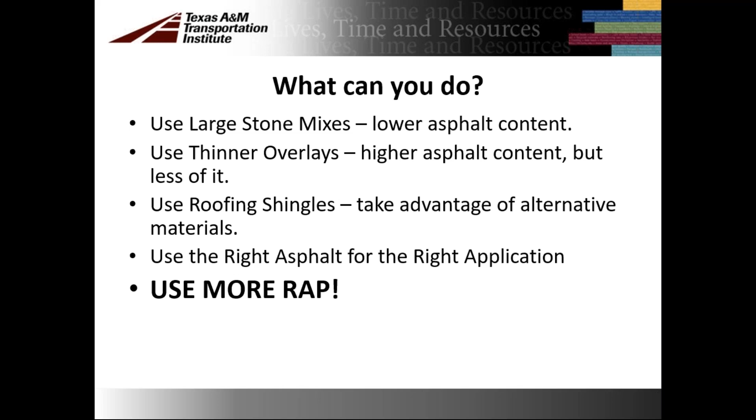So what's the difference? Well, you might have had a bad experience or no experience. Under bad experience, the variability due to poor materials management, you might have RAP coming from a parking lot, or RAP coming from a roadway. And if we mingle those together, the two properties can kind of drive us crazy when we're doing a mix design. So we may want to build different piles with those and deem one for a particular project to help us with that variability issue.

The issue with fines, now we really like the fines in there because I think it builds a paste type that really helps us glue that material together, if you will, if I can use those words. And non fractionation of the RAP, if we don't do that, we could have some bad experience.

I know when I started 35 plus years ago, we just put the RAP over the scalping screen. It flowed into the drum and we mixed it. And sometimes it would drive me crazy doing a gradation. I'm sure a lot of y'all have experienced this.

But now with the fractionation, we can build these different piles of different sizes and add that in percentages and kind of get the outcome exactly what we want when we do a gradation. So the fractionation has really helped.

Under no experience, you don't know how to design a mix with RAP. You don't know how to handle the asphalt content because RAP, recycled asphalt pavement, has asphalt liquid around those aggregates that has been in the ground for a while. And it will flux off as it's heated, and it could increase that content and not be exactly what we wanted.

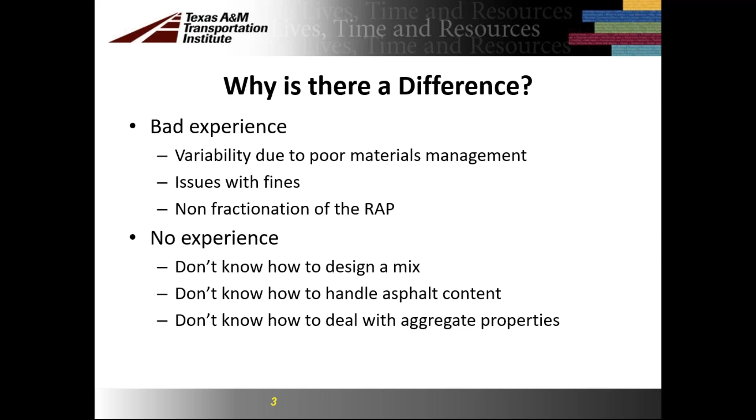I like this part, how to become a rapper. Well, view RAP as a valuable resource. A lot of times it's just the cost of getting it milled off the road and the haul back to the plant, and maybe if you fractionize it, do some fractionation. There's a minimal cost in doing that.

You want to try to minimize the handling of this as much as you can, but with the coating of asphalt, it's not going to degrade the aggregate any. So we can move it around just to save us money, try to minimize that handling.

Treat RAP as you would other ingredients. It is an aggregate, it's a coated aggregate. And we really like that because it adds to the strength of our asphalt pavement.

Offer yourself maximum flexibility in using RAP. Learn what's in RAP, again, the stockpiling. If you've got a parking lot off of a retail shopping center added to a high quality aggregate and high quality binder mixed together, it could drive you a little crazy when you're testing it, trying to get that acceptable range that you'd like to have.

Monitor the process and materials continuously, keep it consistent. So we can do this, we can deem piles for different jobs if we've got the room for it. And it does really help.

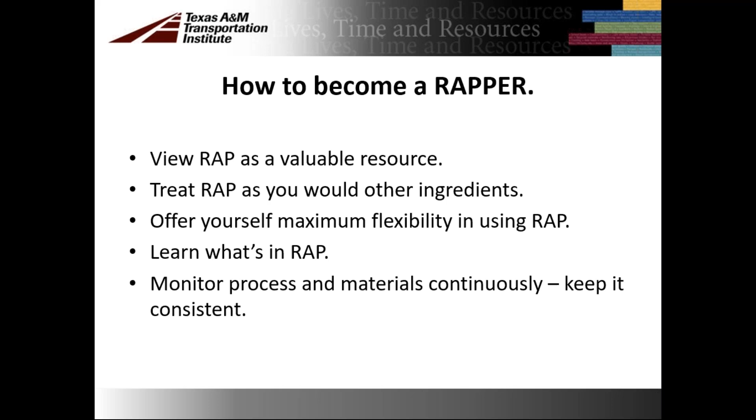I really like RAP. You can see this materials evaluation flow chart. Again, we'll start out with maybe some virgin aggregate, we're going to do aggregate testing. Then if you come down to the RAP, we're going to try to do a binder extraction recovery to see how much liquid there is in that recycled asphalt pavement. We might do some aggregate testing and binder testing.

We might have virgin asphalt there at the bottom, and then we're going to do some binder testing also on that to see our properties. And then as we go across, we're going to combine that gradation and properties and see what we got. Then we're going to combine it with the liquid. Then we're going to choose the highest percentage of RAP for the aggregate and the binder criteria that we have. And then we're going to perform a mix design. So you can see kind of how this flows along.

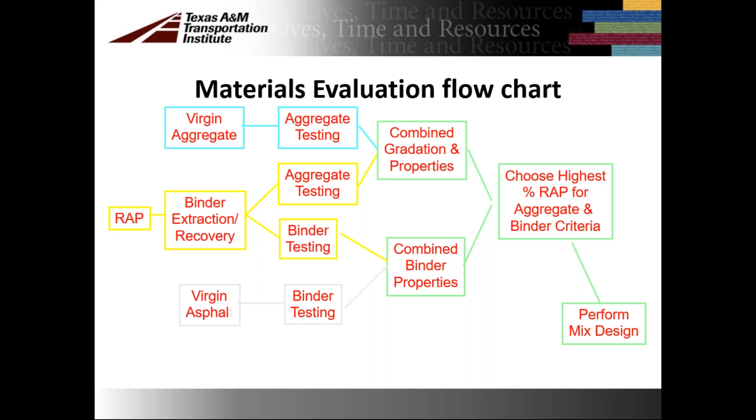Anyway, it's just kind of a flow chart to show you the steps you have to take to see where we're at with all these materials. Of course, can we use 100% of the material? We hope we can.

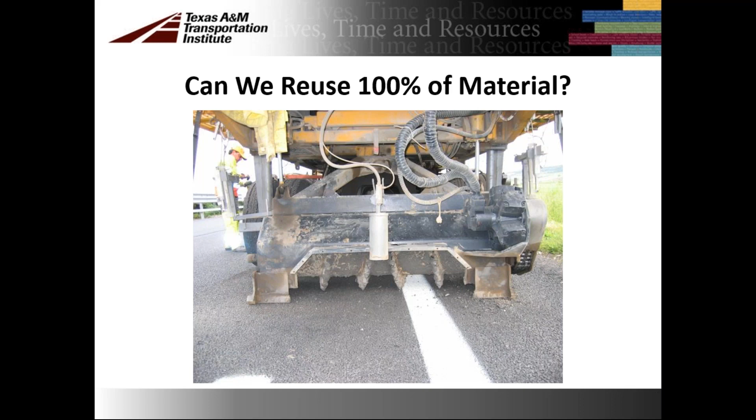Here's one of the big millers. I believe this is over in Europe or Africa, I'm not sure, I can't remember. But it's a big miller, and they add liquid asphalt back in and put it back on the road and till it in, then roll it in and put new material with it. So it's kind of a process.

The problem with RAP is it's old material. That's true, but there's still high quality aggregate in that RAP material that's been tested over and over. It's been on the quality monitoring system for TXAPA or other things, so we know the aggregate's in good shape. The asphalt is still coating the aggregate, and that's the part we like. We're actually using aggregate that's coated with liquid oil, so it just adds to the quality.

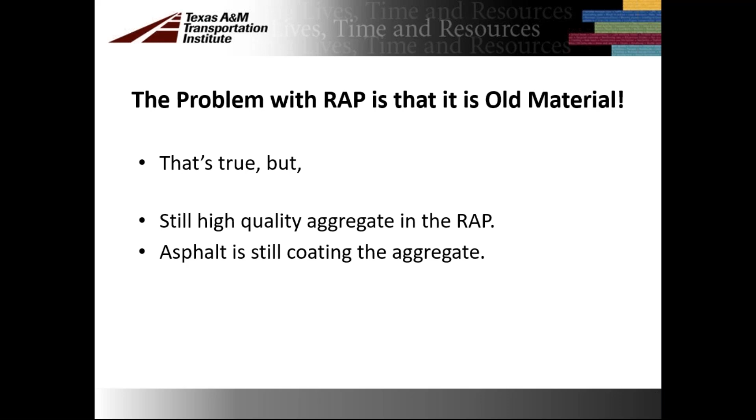The effect of RAP binder on virgin binder grades: the guidelines here are up to 15% will not change the PG grade. At 20 to 25%, use one temperature grade lower. And above 25%, test the RAP binder to see what you actually have.

The alternate is to conduct regional studies on RAP binder properties, to see what's in the area, what we're using, what you have in your yard for RAP. That varies as we go around. In the big metropolitan areas you're probably going to have more RAP than in the smaller areas around the state, where we don't do a lot of milling over and over. So you might just have to do a virgin mix design.

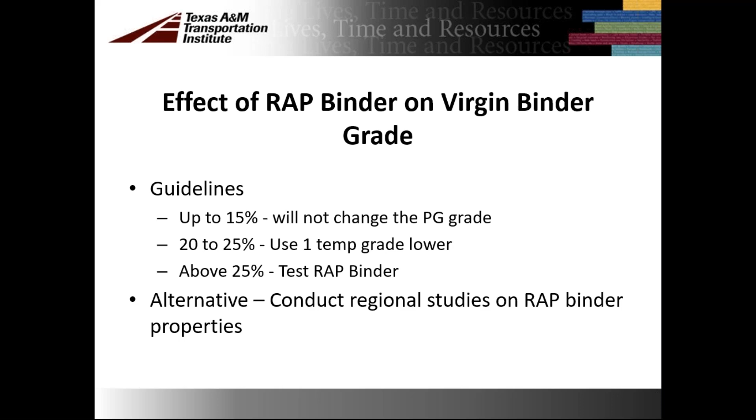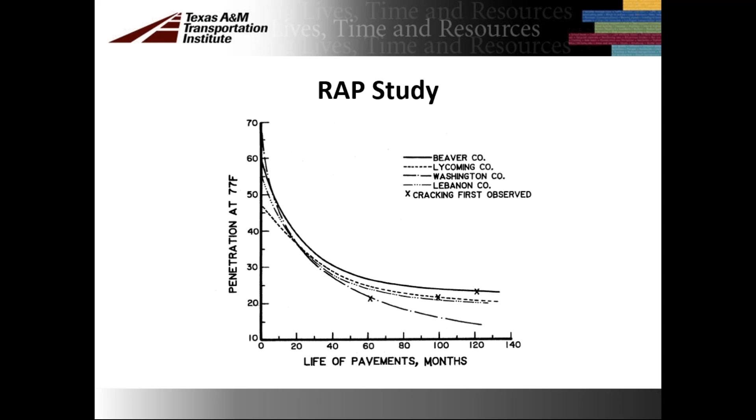Yes, it does oxidize on the surface, and we can lose some of it based on the cracking we observe, but hopefully this RAP will help us cut some of that out.

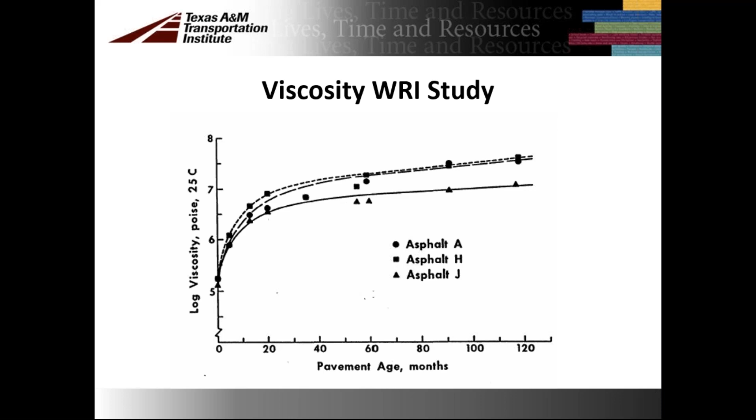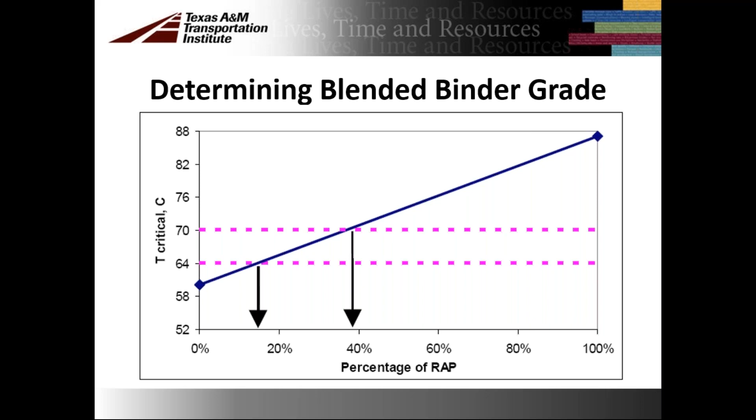Now these numbers may vary just a little bit, but it gives you an idea that RAP does help stiffen the mixture, and it can help you get a grade bump, if you will, on your asphaltic oil.

Now, still have to follow the criteria, whether you're doing it for city, county, state, or an individual. All of them may have different guidelines, but just follow those. This information could be a help to you.

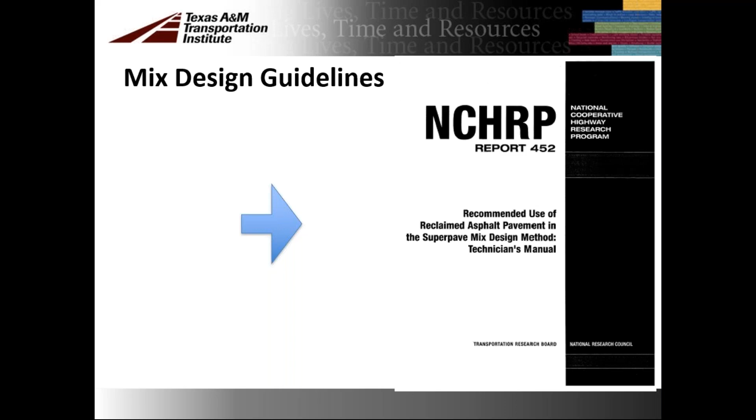As the aggregates enter the drum, they start receiving the heat from the burner, and they start cascading down through the drum. The heat dries the material out and heats it up so that the asphalt will coat the aggregate.

So we usually put the RAP in the lower end of this towards the final mixing stage. That way it will not just, if I can say it like this, melt all the asphalt off the rock, so to speak. We just want to make a good blend, heat it up, make it where it'll blend together really well when we get out on the road and get a good density.

Now, the Hamburg wheel testing machine just really helps us on this, because we can do mix designs, put them in the Hamburg wheel testing machine, and give us an indication of what these properties are going to do in the compacted stage, if we will, before we get out on the roadway.

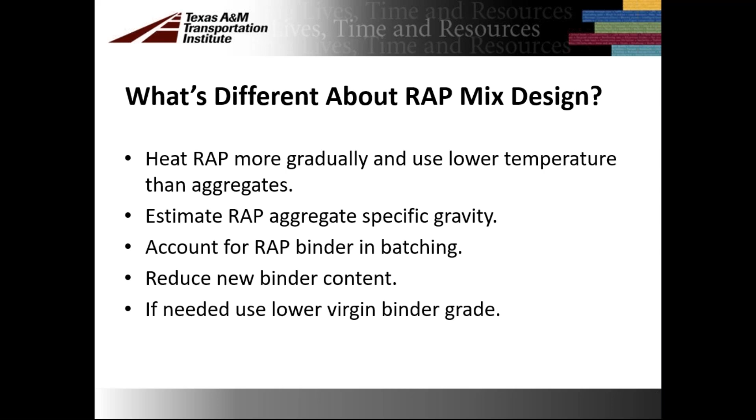We've done all our homework. We should have just great quality in the field with no problems.

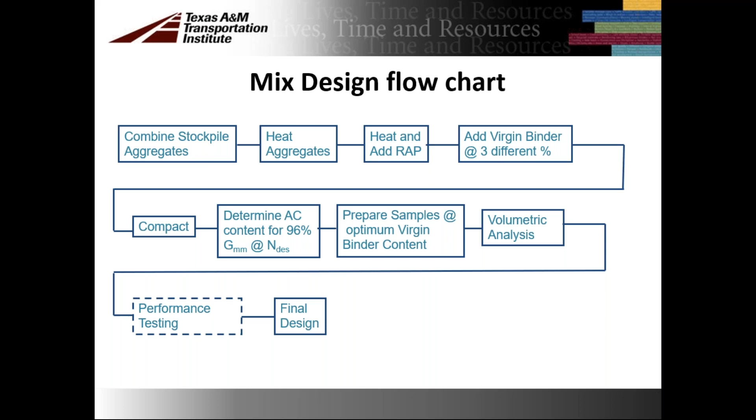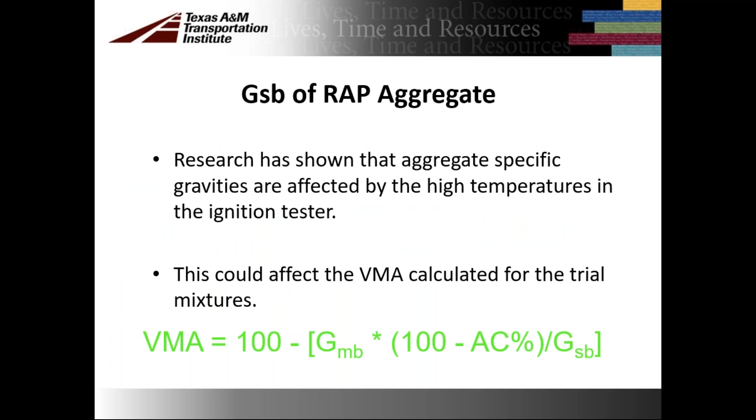So research has shown that the aggregate specific gravities are affected by the high temperatures in the ignition tester. So this could affect the VMA calculated for the trial mixes. So just keep that in mind.

Effective specific gravity calculated from the asphalt content, and the theoretical maximum specific gravity, or what we call the RICE test. Now, if you do that, when we get those numbers, make sure you do the dry back during this RICE test. It's highly recommended to see if you have any absorption. We teach this part of the test procedure when running the RICE gravity test at the center. So just run that dry back and see if you have any absorption.

The GS of E is always greater than the GS of B. The volume excludes asphalt permeable voids, so just keep that in mind. A typical GSE and a GSB correction factor can be applied.

Of course, I wish we could really, that's supposed to be G's of SE and G's of SB if you really talk lab work, so sometimes we do that and sometimes we don't.

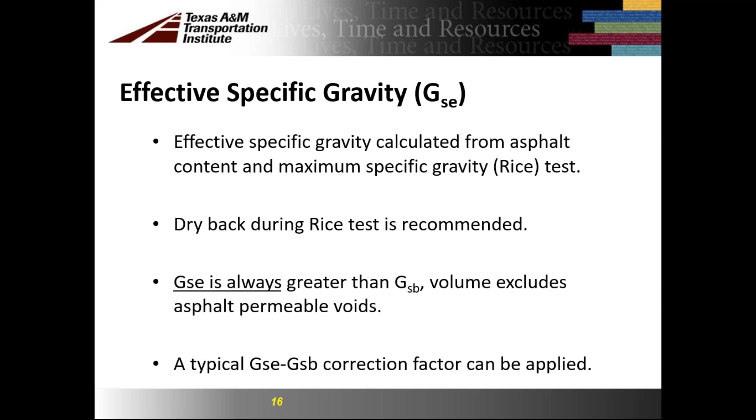You're vacuuming that sample for 15 plus or minus 2 minutes. You're going to decant that water off through the number 200 sieve, put that material back in. And again, dry in front of a fan, do the proper procedure. And you may have to do this a couple of times, if you're not real familiar with it, or you don't do it on an everyday basis. Just make sure you're getting a good answer to help you in your process.

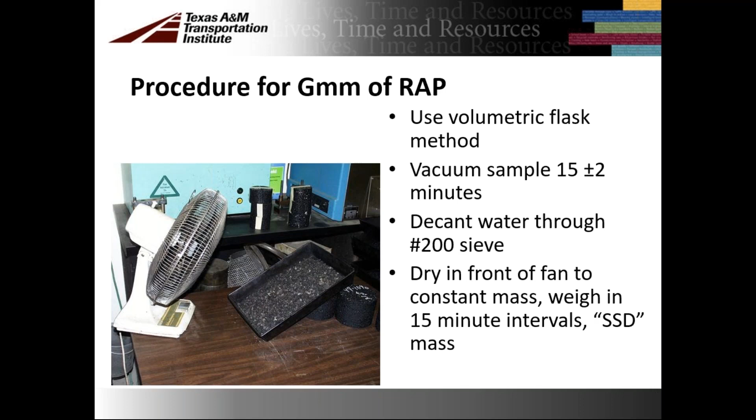Plant verification flow chart: set the plant controls to mix design proportions, produce approximately 200 tons of hot mix asphalt if you can do that at the plant, and take a sample at about 100 tons. That way you run some material through the plant, everything should be heated up and working properly, and compact 2 samples at mixed design level.

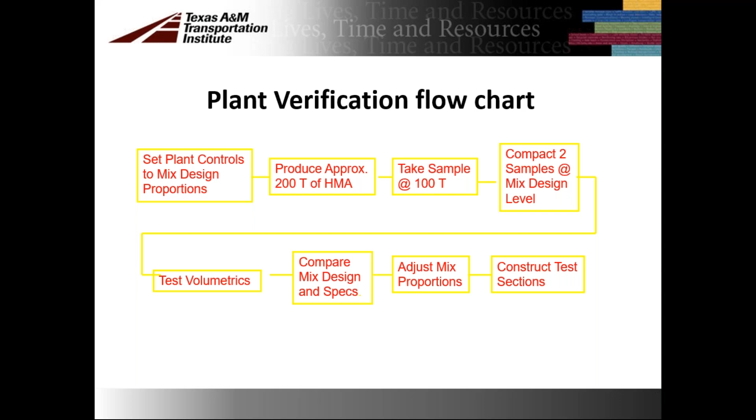Test the volumetrics, compare the mix design and specs, adjust mix proportions if you need to, and then construct a test section to see if you're going to get that density you want, things like that. These are all things we can do to assure the quality of the asphalt in the roadway. After all this design work and testing, we really want to make sure we got good quality asphalt out there on the roadway.

Quality control testing: of course we're going to test the aggregates. Gradation is very important, we know that. The quality depends on the mix type and the source of the aggregates. Under RAP, the gradation and binder content are very important. The binder and aggregate properties depend on the percent of RAP put in there and the mix type. And then the binder can be certificate of compliance binder or quality assurance binder. Keep those in mind under quality control testing.

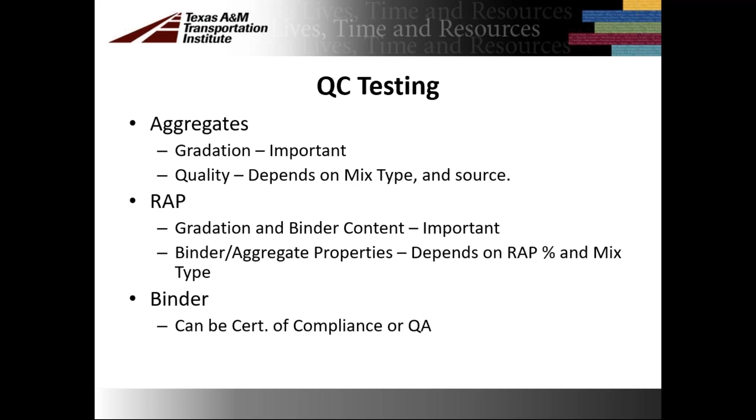Quality control testing again on the mix itself: gradation is very important, and the binder content, which we'll probably put in one of our burn-off ovens. The loss of material would be our asphalt content, and there's a few things you got to do there. Then we can take that aggregate after it cools down and run our gradation on it to see if we're actually getting the components in the different sizes we wish to have.

Volumetric properties: the voids is very important, the VMA, the VFA, the bulk specific gravity, the Rice test, all very important. Of course, then our in-place air voids. Density is just opposite of the void, so to speak. If you have 96% density, you subtract that from 100, so you have 4% voids. We can talk it either way. I can drive up to a project and ask, what's your air voids on your test sections? They may say 5%. Well, I know they got 95% density, so we can talk it either direction.

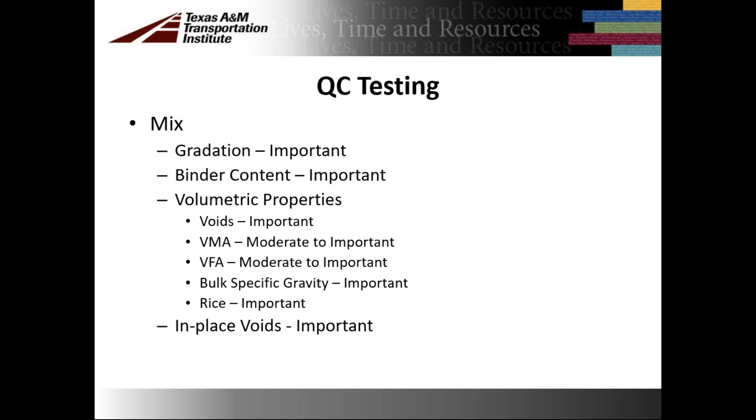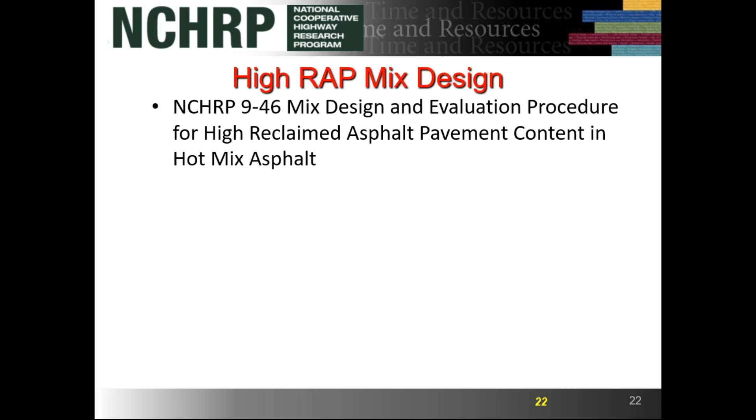High RAP mix design: this was a mix design done by NCHRP 9-46, the mix design and evaluation procedure for high reclaimed asphalt pavement content in hot mix asphalt. The objective was to develop a mix design method and specification for hot mix asphalt containing up to 50% RAP. This is probably an ongoing thing. This is the NCAT test section over at Auburn University, where they lay different test sections and drive vehicles over and over all the time, monitor this stuff, and give these research papers back to the owners of the asphalt.

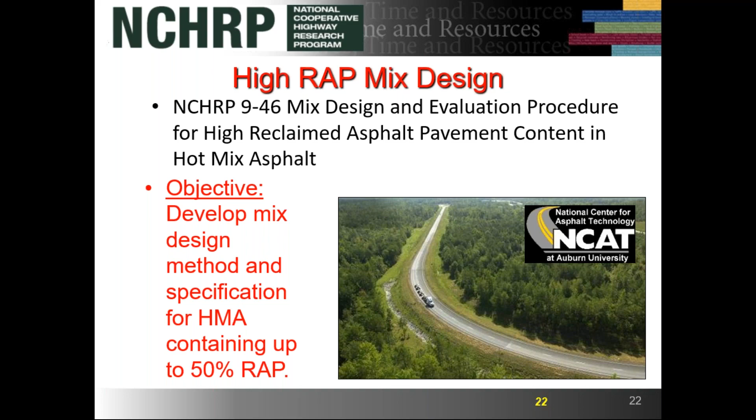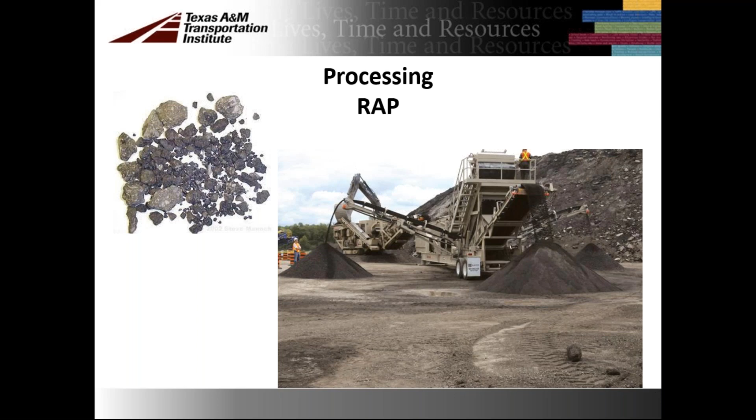Processing RAP: we're fractionating RAP nowadays, which really takes a lot of the guessing game out of it. You can see here a fractionation plant set up, a huge pile of recycled or reclaimed asphalt pavement, which could be from various places. It is coated aggregate, and you can see the different piles it's placing on each of three sides of the plant. We can develop stockpiles of this, and our loader person can load different percentages into the plant, making it a much easier design and way of testing the asphalt properties at the final stage before it goes to the roadway. Make sure our gradation is just dead on.

Maybe we've lost our skid values on our surface mix, so we want to put down some more material to get our skid values back. A lot of times it creates some dust, but usually they'll broom and vacuum these roadways or sweep them really well so it's a lot cleaner. As you remove the surface, you've taken off the oil and other materials that got deposited on the roadway surface, giving us better bonding and improved smoothness. These new milling machines nowadays can do a variety of things for you, increasing smoothness, and we know a smooth road lasts longer. It improves performance. We want these materials to perform for a long time, to give the consumer a good product they can drive on, that feels safe, that can carry their people with them all the time over a good, smooth roadway.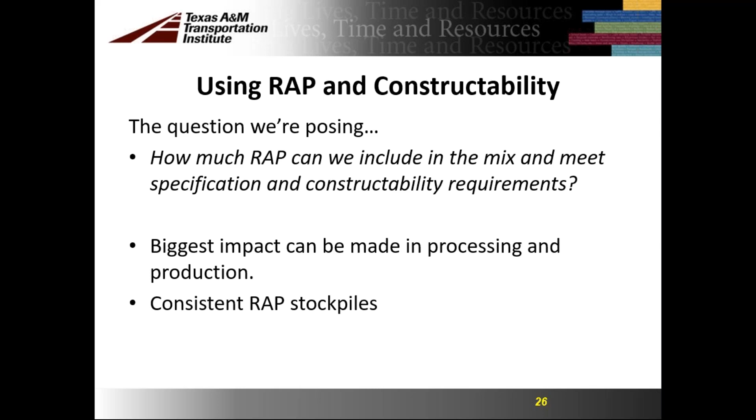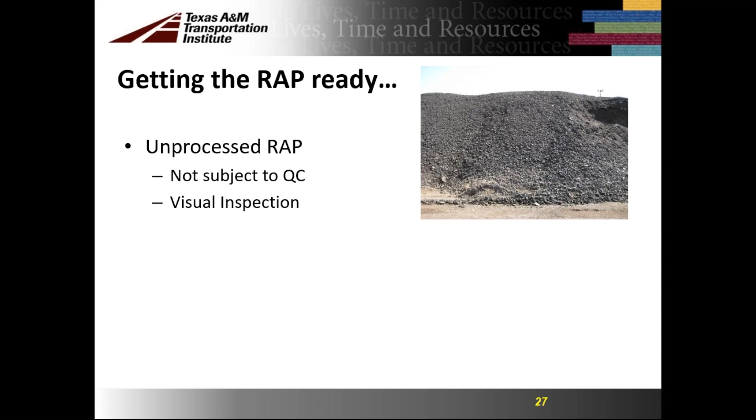Unprocessed RAP is not subjected to quality control monitoring, maybe just visual inspection. Now if we're going to use it for other purposes, other entities like TxDOT or a city may wish to have test reports on that. Of course, the processing of RAP, fractionation if you will, requires a uniform size, which promotes final blend consistency and just helps us in the long run.

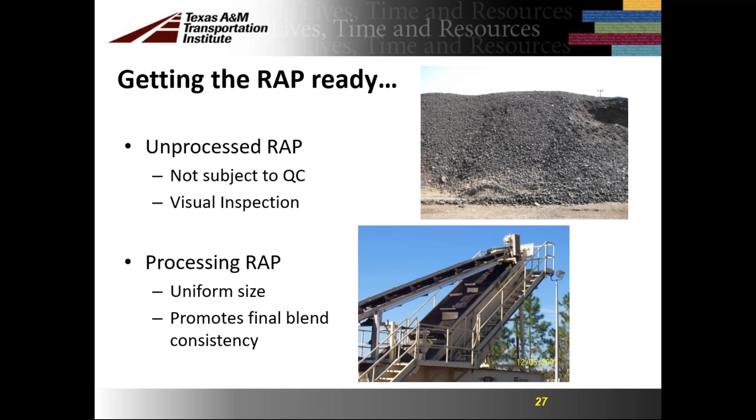Maintaining RAP quality, you can see the stockpile here in the picture. We don't want to build those piles too high because those rocks can roll down off as you're building a conical pile. But if all the material is about the same size, then we're doing a very good process here. So we've got to worry about that conical pile with the rocks falling off.

We want to keep our stockpiles from coming in contact with other sources. Just keep them well maintained and sample frequently to see if you're still getting the consistency you want.

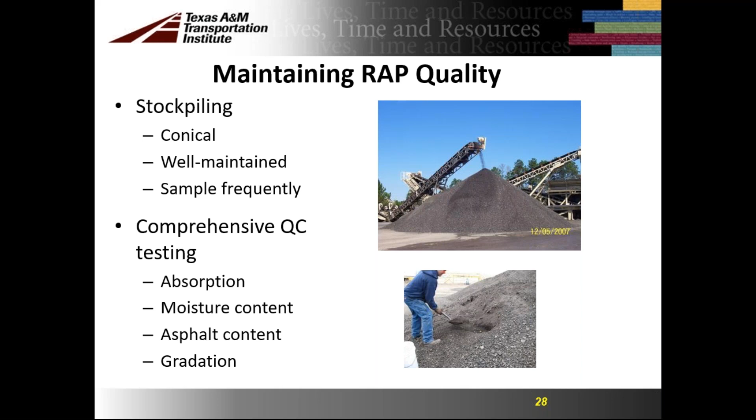Of course, comprehensive quality control testing - we want to check for absorption, moisture content, asphalt content, and gradation. A lot of times those RAP piles can get a lot of rain on them, and it does take time to dry them out. So you just might have to check on that on a daily basis if you're running RAP each day.

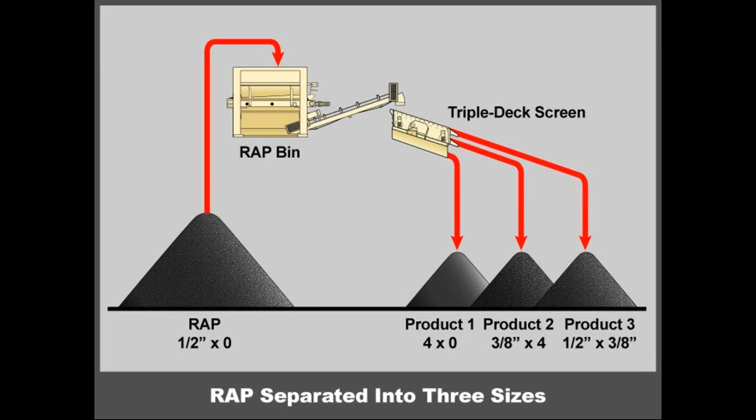You can see here we have a RAP pile, and we put it through a RAP bin, and we've fractionated or brought this material down into product 1, product 2, product 3. Just a picture to show you what we can do with the RAP to help us when we blend it at the plant.

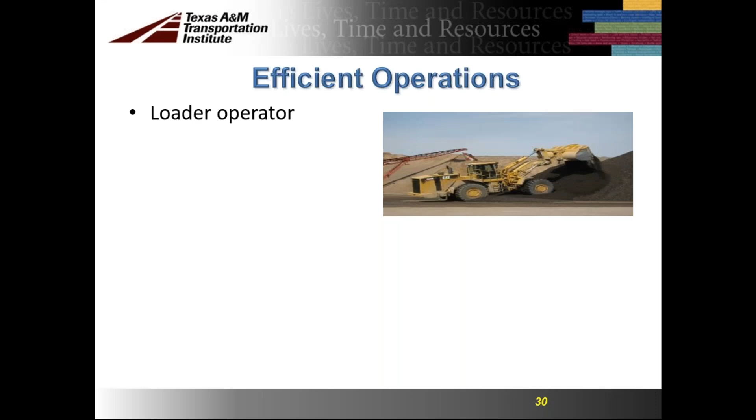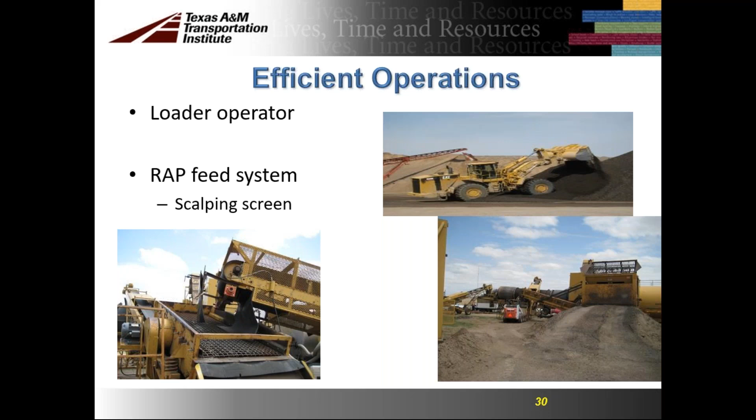Efficient operations. We want to make sure our loader operator is educated on what we're doing with this RAP and how to keep it stockpiled. We want to make sure the RAP feed system and scalping screens are all functioning properly. You can see some pictures here showing how these units will take the larger parts off that we don't want to get into the mixture. If we're doing a 2-inch overlay, we don't want any 3-inch rocks coming in there, because we won't be able to put them down into the mixture. So these are various ways that we're doing efficient plant operations.

At the plant, superheating of the aggregate, like we talked earlier about how this aggregate flows through the plant. The baghouse fines are sucked out of there and then introduced back in. The airflow - if we're going to do warm mix, we've got to have the warm mix additives. All of this, in terms, has to get us a quality product.

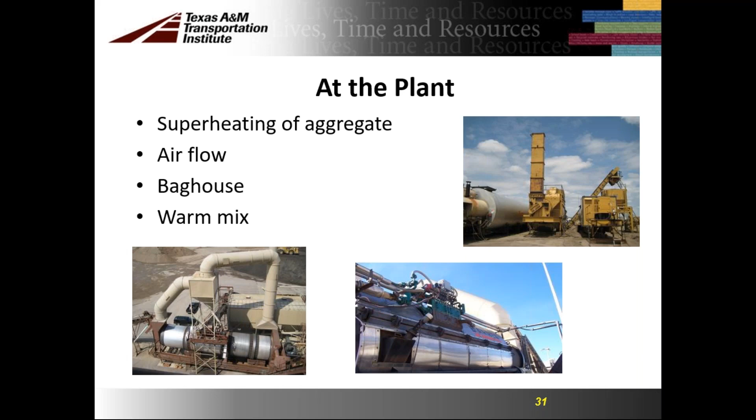Lay down and compaction have no special requirements or techniques, but you may require a little more attention than conventional mixes because we do have the RAP in there. The mix workability might be a little bit stiffer, and your densities could be increased.

You might have to do more roller passes or less roller passes. You might have to use a heavier roller. You might have to run the mix just a little bit higher in temperature at the plant. All of this has to be taken care of by the quality control people.

Cooler temperatures might reduce the compaction times, while warm mix technologies can extend compaction times. You can look up these products for warm mix additives. These can all assist in the compaction process by giving you a little more compaction time, but you can't just sit over there and wait and take a nap. You have to get onto it and understand what's going on.

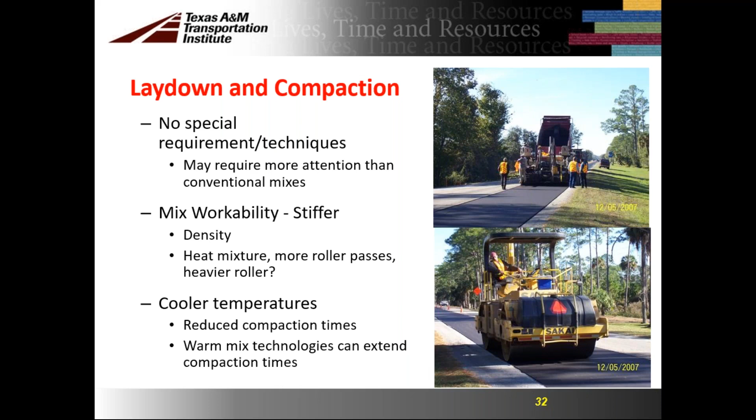But these things are all approved. You can look them up on the monitored catalog of approved sources on the internet, and maybe find some products you want to use.

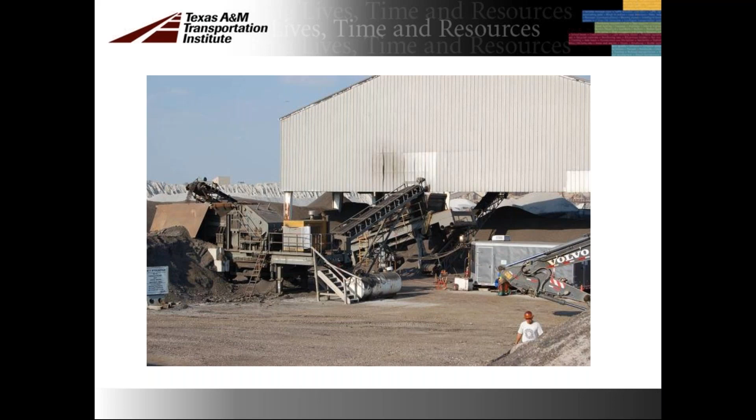Here's a scalping screen, some areas have got this ready to create some RAP piles. Maybe they put the RAP piles under a building like this one here to keep the material from getting wet. So these are just things you might could do to help this process.

So who owns the RAP and what are they doing with it? Well, a long time ago, if it was a TxDOT job, it had to be deemed back into the mixture, or it could be given to the counties and maybe the cities to help them with some of their mailbox turnouts and things like this. Those things have changed now. It usually is the possession of the contractor, and then they can use it as they will, back into the mixtures.

Here's a chart that Dave had talking about some states that allowed different percentages of RAP in their material, and you can see these dates out to the right. Under the permitted intermediate layer, which is directly under the surface mix, Florida had 30% greater than or equal to that, and 0 in the surface. They had kind of capped it at a 45% usage maybe for the base material.

Kansas, you can see, was a little bit lower. Delaware, a little bit lower than that. Some of these were done in the summer, spring, fall. So this was all under the warm mix asphalt process, and they were having very good success with these projects.

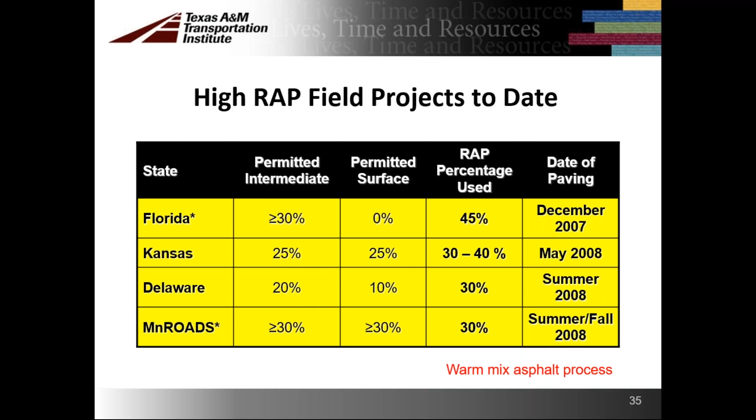So a little bit of summary: still about 5 to 10% RAP can be used under existing specs. We can use a higher percentage, we're learning that, and some of the specs reflect that now. We need to work with the agencies to increase allowable RAP, especially where it's not allowed. We would like to use RAP all over, so just keep that in mind. I really think it adds to it if it's done correctly.

The two biggest obstacles in mix design are the binder characteristics - you have to understand what they are, run the test, get those percentages - and then that minus 200 material, or the 200 material, if you will. That's our dust, and that creates that paste, if you will, and it just helps the binding process. The mix design procedure isn't too different when we do this. Again, we're using coated aggregate. It's just a win-win.

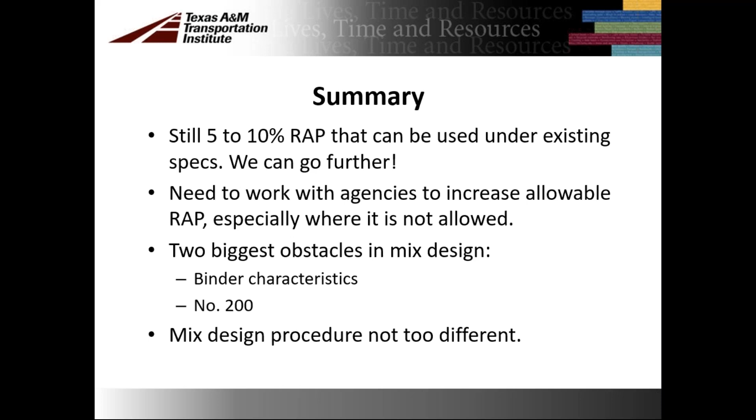We need to work towards all mixes having RAP. The consistency is the key to increasing RAP content. Testing is needed - we just can't sit back and say, well, I'm going to increase it another 5%. We've got to know what we're doing. We still need a suite of performance tests, especially for the cracking, which a lot of entities are working on right now if they haven't already got them established, and we'll talk about those in the future.

Our best hope is to stabilize cost and don't compromise quality. Please don't do that. Again, this is a material resource that we can use - it won't go into our landfills. And again, we know all asphalt pavement is recycled more than any other product.

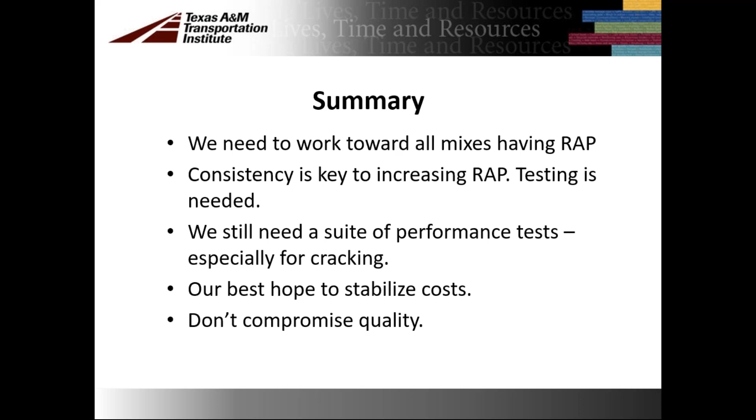Here's some RAP guidelines, number 123 and 124, put out by the National Asphalt Pavement Association. You can look these up on their website, or probably look these up on the internet. You can call NAPA and see if you can get some of these products - they may even have an up-to-date version of these. Very helpful.

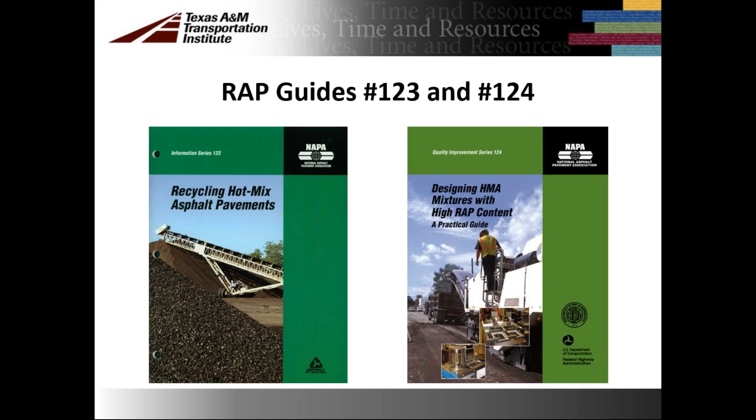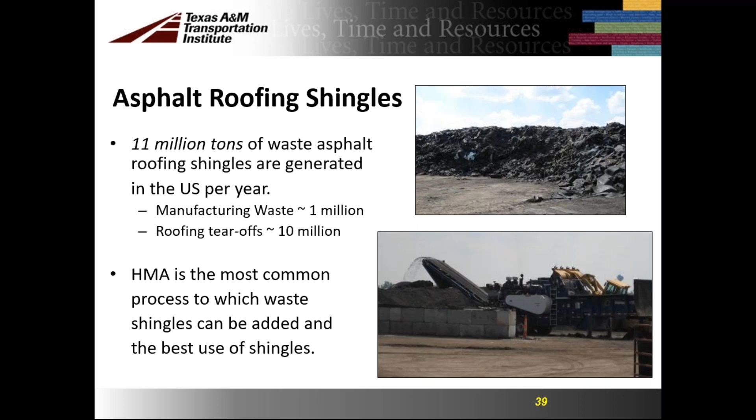Of course, we'll talk just a little bit about shingles. We know there's a lot of them, and it's all waste. We'd really like to try not to put those in landfill operations. Hot mix asphalt is the most common process to which waste shingles can be added, and the best use for the shingles. We do have a little bit of trouble with them at the surface, and all of y'all know these issues, and we can probably get to a point where we can alleviate that.

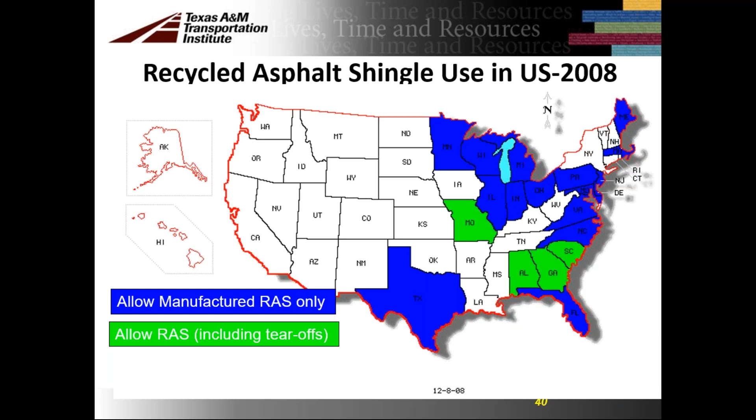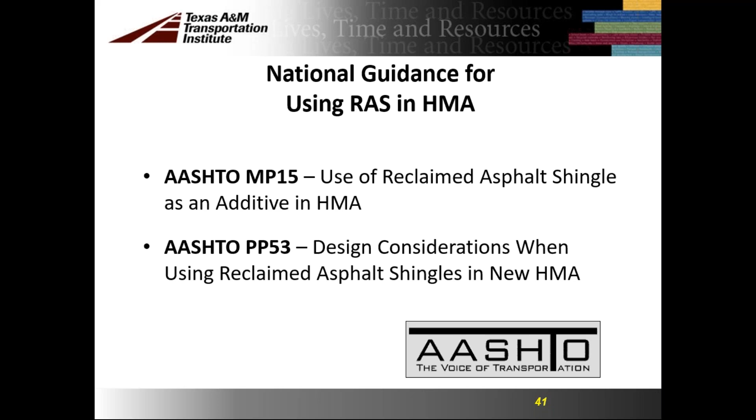The national guidance for using RAS in hot mix asphalt—you can see some AASHTO publications that could be helpful to you. Of course, another guidance for using shingles, best practices for recycling asphalt shingles. There's a website there, and then the use of waste asphalt shingles in hot mix asphalt, state of the practice. So there's another couple of items. If you'd like to take your camera and take a picture of those right quick, I'll leave it up there for a few seconds.

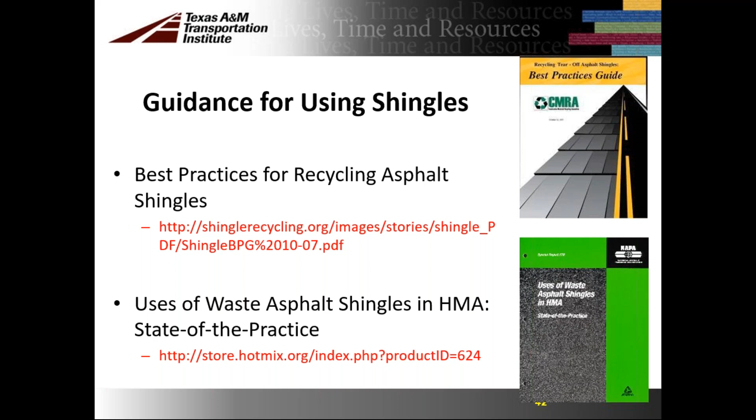Again, you can go back and view this webinar at another time, as we record these and get those posted. There could be some updated versions of this already from NAPA in various places, but there's a lot of research out there.

Here's the Construction Materials Recycling Association, CMRA. This publication was dated 2009. You can see some of the sponsors and co-sponsors on this thing.

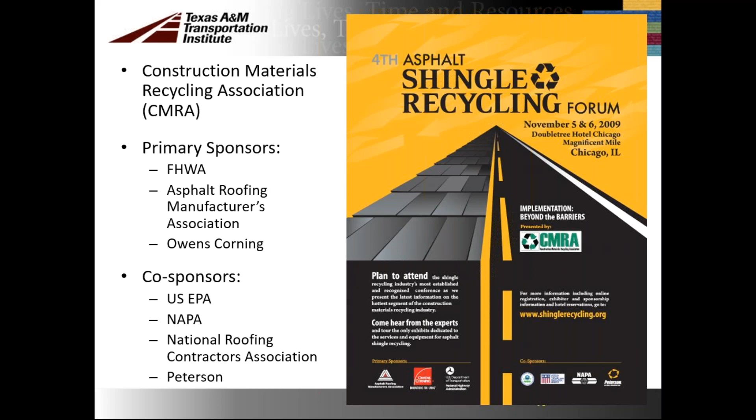Of course, this is not what we're looking for—this is not recycled asphalt shingles in our asphalt pavements. Most of y'all have driven around the state and probably seen where they drop shingles on the roadway. They really stick and stay for a long time, but that's not what we want to do with them.

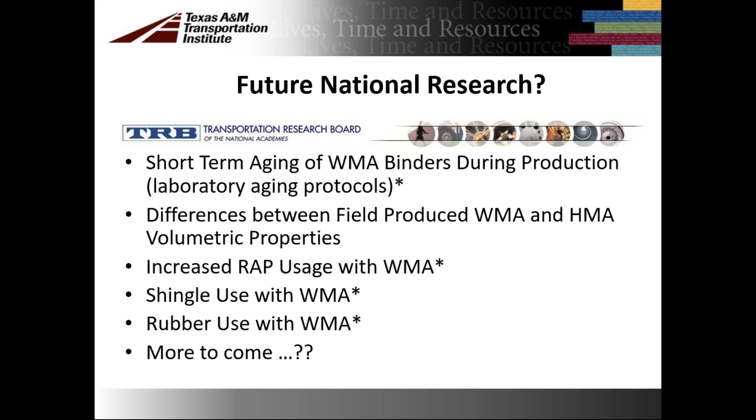Of course, we want to talk about the short-term aging of warm mix asphalt binders during production using RAP. There's ongoing studies done at TTI and various other places to increase RAP usage in warm mix asphalt, shingle usage in warm mix asphalt, and rubber, where they take tires and melt those down—a very good process. And there's more to come. Everybody's doing research, and it really helps us that these people do this and give us this data back in publications, helping us in the future to become very green on this earth, so we can save some of these products for the future.